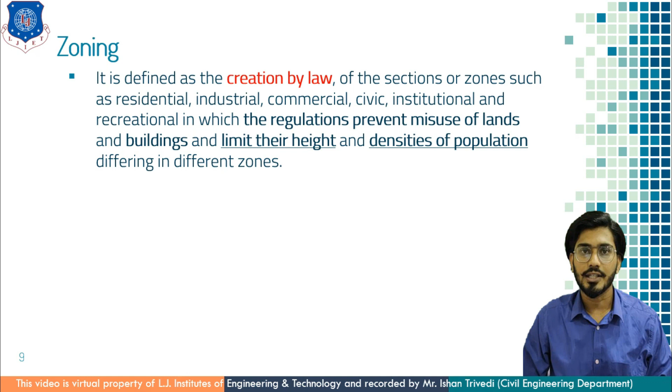So the second term is limiting the building height and the third term is density of population of a town. Remember these three phenomena, that is use, height and density. We will discuss these three phenomena later on. Next is the importance of zoning.

Zoning sets apart different areas in the town for a specific purpose. It prevents encroachment of one zone upon another zone adjacent to it. For example, the industrial area is located away from the residential area, so it is not affected by dangerous gases, smoke, pollution, etc. The business or commercial areas are also separately located, with garages and service stations at a distance from the residential area, so that you can avoid encroachment of one zone into another zone.

People have a tendency to build their houses near to the industries. If they find open space near the industrial zone, they acquire those lands. Due to encroachment, a residential unit in the form of a slum is settled in a town without any idea. And that's why there will be encroachment of one zone into another zone, and it has to be eliminated.

Next, the population is distributed throughout the town by zoning regulation, so that there is no concentration of population in any particular zone. You have to design or plan a city in such a way that there is no unnecessary concentration of population in one particular zone or area, and the facilities and amenities have to be equally distributed across the city.

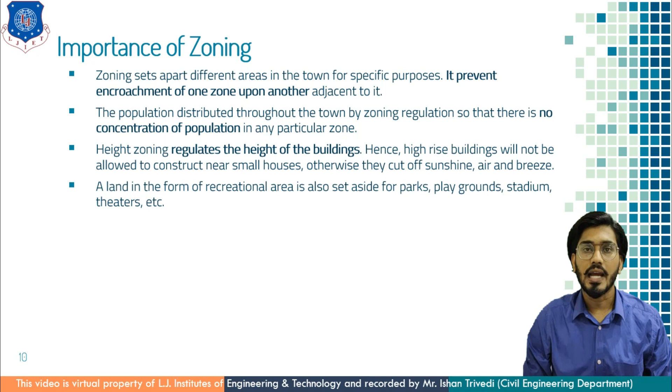Next, zoning helps proper coordination of various public amenities like water supply, drainage, electricity, transport, etc. As I said earlier, before laying any road network, we have to provide drainage and water facilities in the town, and only after this underground work is completed can you start constructing the roads. So there has to be proper coordination, and this can be achieved by zoning.

Next, zoning secures the orderly growth of a town and promotes health, safety, and order in the town. It increases the utility, beauty, and efficiency of the town. You can eliminate the chances of fire and the consequences and subsequent damages of fire hazards. So these are the importance of zoning.

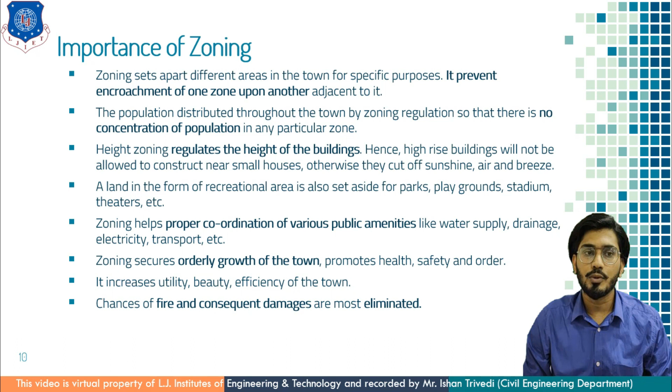Now let us understand the objects of zoning. As I said earlier, it serves as a main tool for the town planner to maintain the future growth of a town as it was envisaged originally. Zoning affords proper coordination of various public amenities. Zoning makes the TP scheme, meaning town planning scheme, effective and successful.

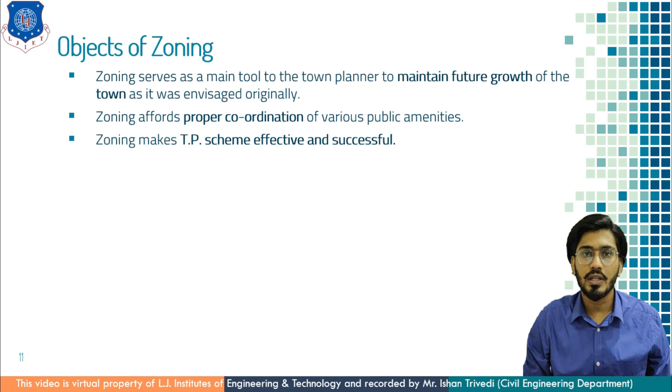You have to remember, zoning is the only tool through which you can make a town planning scheme successful. Otherwise, failure in the distribution of various elements in the town makes it difficult in future. So it is advisable, while doing such planning, to make coordination between the amenities and various elements of a city, and ultimately, to make town planning schemes successful, zoning plays a key role.

Now let us understand the principles of zoning. These principles are arrangement of zones, boundaries of each zone, flexibility, new town and existing town. These are the principles of zoning. Let us start with the arrangement of zones.

The zones may follow the pattern of concentric bands, meaning a radial system, or you can say concentric combined with radial system, such as CBD area, subcentral area, intermediate area and undeveloped area, where the development is more focused on the central area than the subcentral area, where industrial and household activities go parallel, then the intermediate area and undeveloped area, which is the outermost peripheral area of a town. And that's how the city has to be designed.

The other pattern may be provision of blocks for different uses in different parts of the town. These blocks are industrial blocks, or you can say special economic zones. In some cases, these are hubs for a particular class of activities.

Next is boundaries of each zone. The design of boundaries for different zones should be carefully done. These boundaries are done by considering road network, railway line, park, open space, drainage line. These are the key parameters which help in determining the boundary of a zone. You can take a reference of a railway line or a major road passing through the area and divide the area into two different zones.

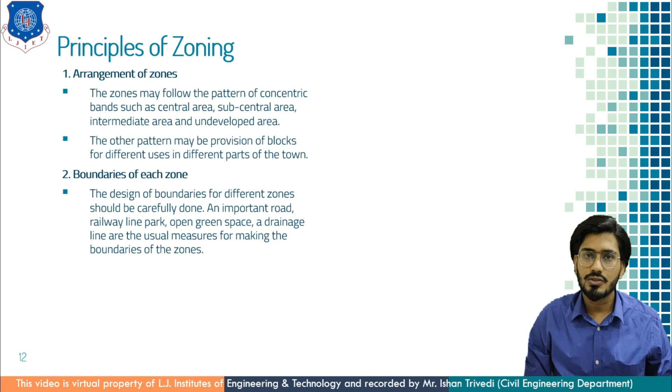Even in Ahmedabad, there are other categories as well. The zoning has been done in terms of direction, such as north zone, south zone, east zone, west zone, new west zone, north west zone, south west zone and central zone. So these are the classifications of zoning in terms of direction. So which is the convenient way to determine the boundary in terms of data analysis, in terms of providing facilities? These are the matter of discussion.

Third is flexibility. The principle of zoning should be rigidly enforced, but there has to be some flexibility in the planning of zoning. For example, the place of work should be near the residential area, but it should not be too close to the residential area. Otherwise, there will be noise pollution, air pollution, and many other health related diseases can happen in future.

In the same way, a small shopping center may be allowed in the residential area for day-to-day requirements. In your surroundings, you will find certain complexes. Like on a main road, you will find that the first two stories are commercial and the above two or more stories are residential. That is called mixed land use. So you have the benefit of a shopping center as well as a residential unit. And this is how you can utilize the space.

Next is new town. For zoning a new town of known population, the areas required for residences, industries, open space and business should be worked out, and the town is then divided into different zones. While determining a new town, first you have to determine the population, then after the calculation we will forecast the population. Based on these requirements, we will determine various zones such as residential and industrial units, open space, business hub, and the land will be allotted based on the future growth and the trend.

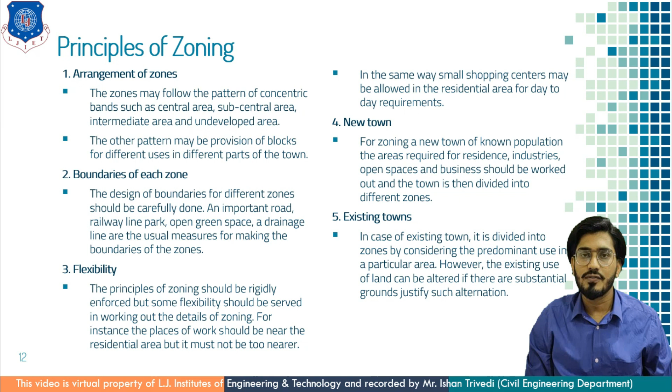So this is the basic introduction of zoning and its principles. I'm ending this session. I hope you have learned these basic concepts of zoning.